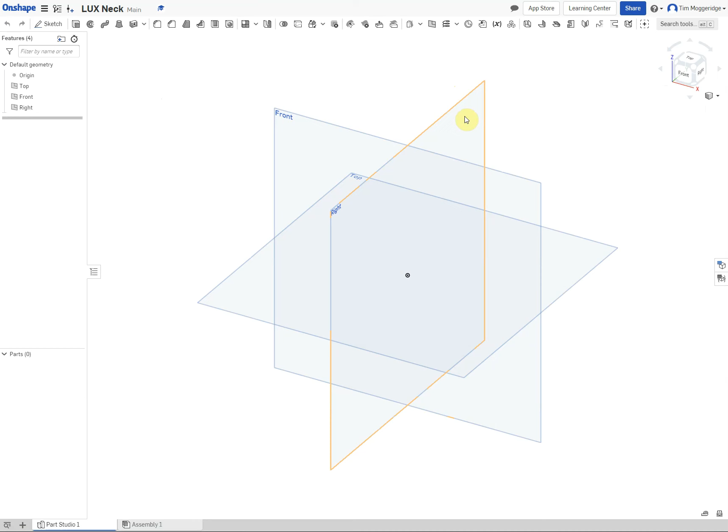Let's create a document and we will call this LUX neck. Once we're in the drawing view, we'll select a work plane to work on. I'm going to just pick the right work plane. I'm going to right click, click on new sketch, and then right click again, view normal to sketch plane.

I'm going to use the center point circle tool, which you can remember change by clicking on the arrow. It's not the one that's coming up. I'm going to start off by drawing a circle from the origin where the three work planes meet, then carefully lining it up, draw a smaller circle up above.

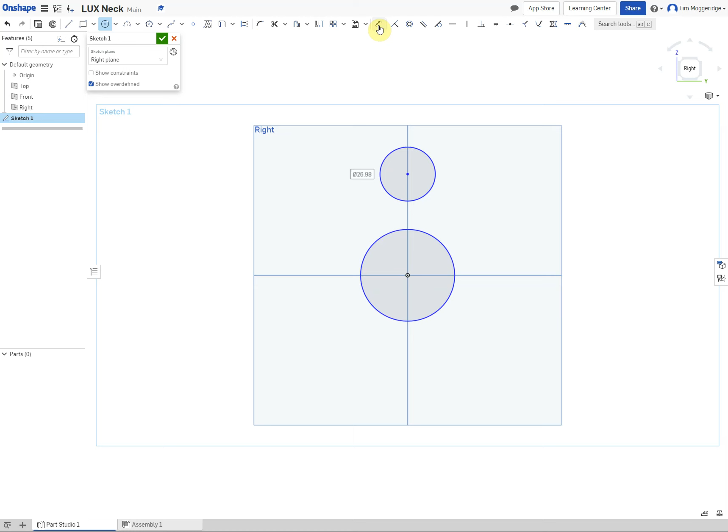I'm going to use the dimension tool to dimension those. So the top one I'm going to dimension 20 millimeters, bottom one I'm going to dimension 35 millimeters, and I'm going to dimension the distance between the centers at 40 millimeters.

So we're now going to join these two circles up. I'm just going to draw a line that overlaps the inside of both circles. I'm not worried about the length of it at the moment. I'm going to use the dimension tool to dimension from the work plane edge that lines up with the origin to that line, and I'm going to make that 7.5 millimeters.

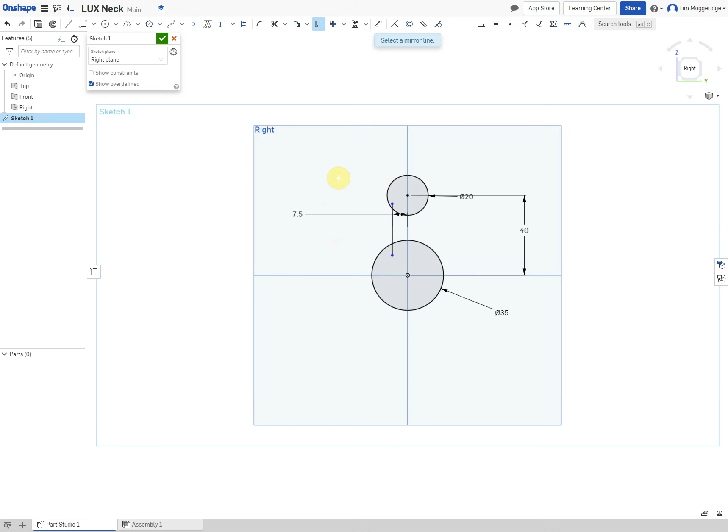I want one on the other side as well, so let's introduce a new tool, the mirror tool. I'm going to click on the mirror tool, and because we're in a sketch, it's asking for the mirror line, which is going to be the edge of this work plane. Then I need to select the entities to be mirrored, which is just going to be the line that I've drawn, and it puts one over the other side.

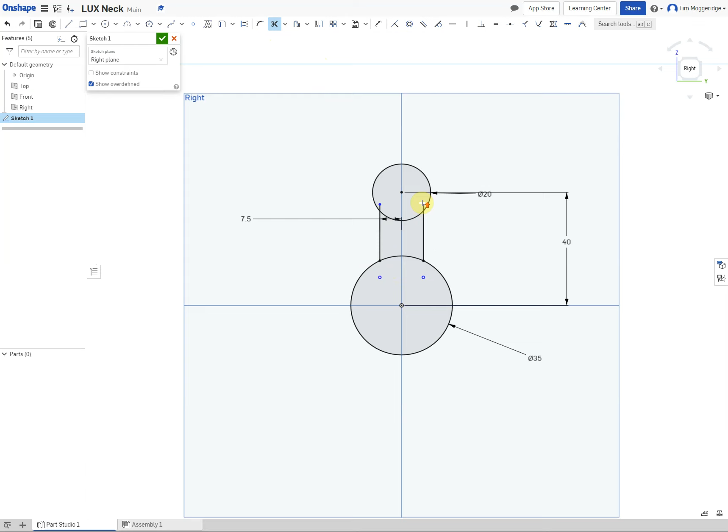Once we're happy with that, we can then click on the trim tool, and I'm going to trim off the bits I don't want. So I don't want the ends of the lines that are in the circle. Remember, I can use the scroll wheel on the mouse to zoom in, but I also don't want the two parts of the circles that are inside as well. So that's the shape that I want.

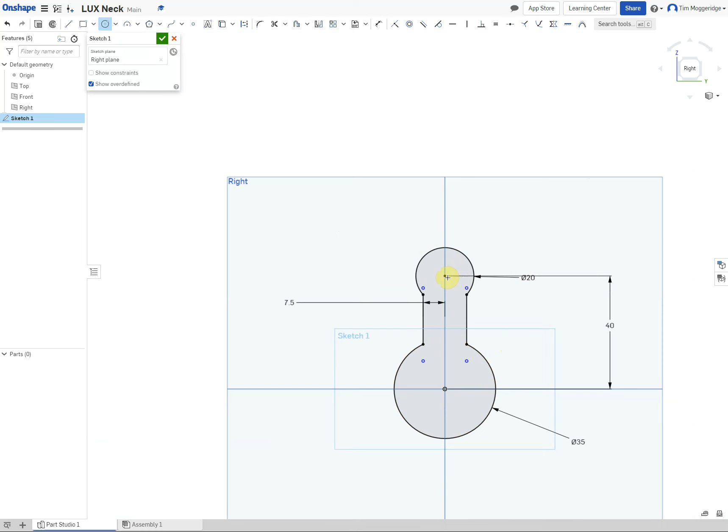Now I actually want some holes in here as well, so I'm going to go back to the center point circle, and I'm just going to drag out two smaller circles that will become holes. I'm going to dimension those both at 6 millimeters, so those are concentric with the other circles that are already there.

And that's the first sketch done. That's the first part done. So I'm now going to apply a feature.

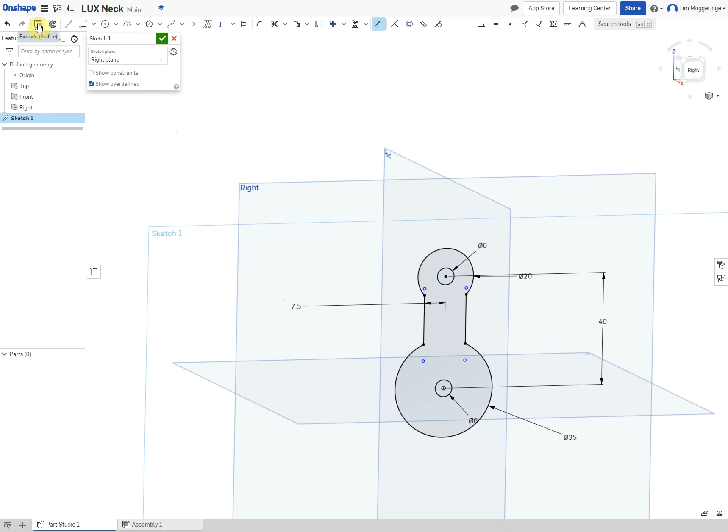I'm going to extrude, and I want to extrude 3 millimeters. It's coming at the screen towards me. I'm going to click on the arrow to send it in the other direction, and then click on the green tick to say I'm happy with that.

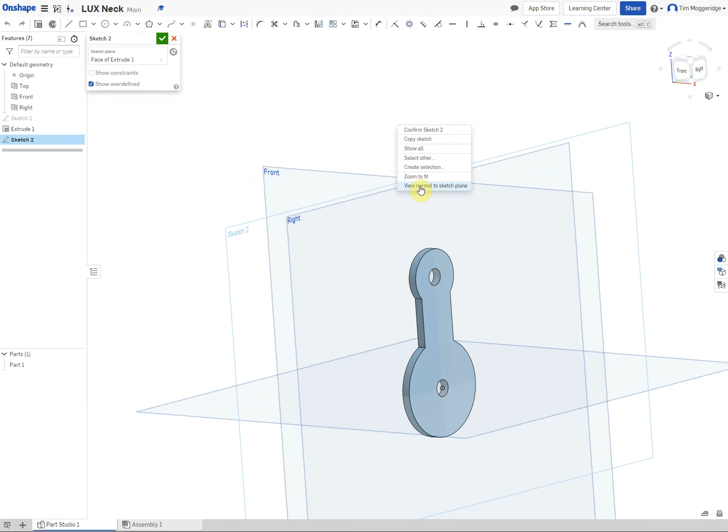I'm now going to right click on this top surface and create a new sketch. Right click to view normal to the sketch plane, and I'm just going to use the center point circle tool again, and I'm going to create two circles. One that's going to line up with the bigger circle at the bottom, and one that's going to line up with the smaller circle. Now if it doesn't snap to it, I can just make it too big and add a dimension and just dimension that to 6 millimeters again.

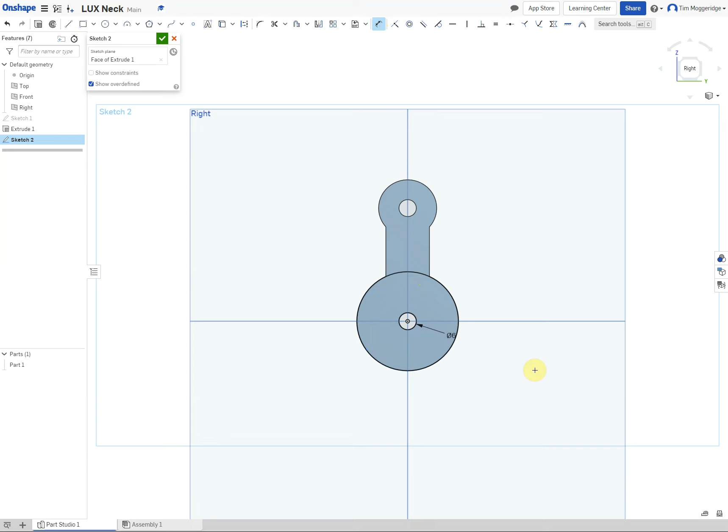So now I've just got a circle within a circle, or a donut if you like, and again I'm going to extrude that, and again that's just going to be 3 millimeters. And that's that part finished.